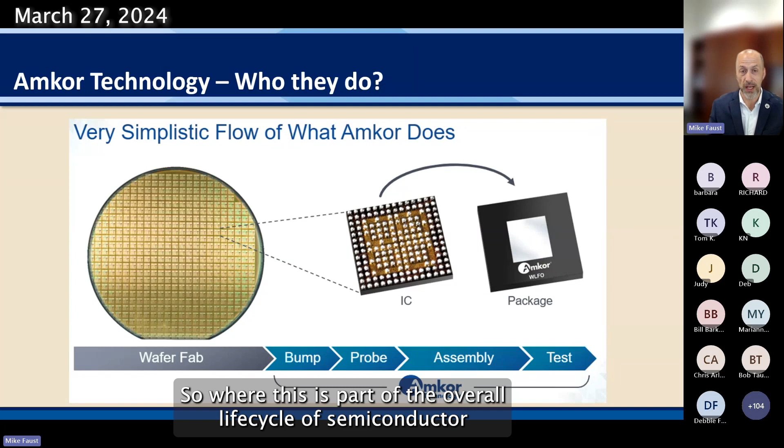What actually happens in the Amkor process: their base product is that wafer, all those small little chips. They cut those chips off, then ultimately do a series of subsequent processes where they package and assemble semiconductors and microelectronics, then conduct that assembly process and ultimate testing. So this is part of the overall life cycle of a semiconductor manufacturing process, but it is very, very different than the wafer fabs that are Intel and TSMC.

We've received a lot of questions about where Amkor will be located. This map is a conceptual development map of 5 North at Vistancia. Amkor is specifically a 55-acre project site within the broader 320-acre project overall. If you look at this map, El Mirage is on the left side running north and south. Lone Mountain Parkway bounds the north end of the park, near the community shown by the blue and red lines. Down on the southwest corner, that white boxed-out area, that's where the Safeway is, at the corner of Vistancia Boulevard and El Mirage.

So that gives you some context of where this is. The property is located off of El Mirage, about 3/8 of a mile from any of the single family homes that are currently existing. And so that's where it's located.

We've heard a lot of folks say, well, this is displacing, or we will no longer see the planned retail. That's not an accurate statement. This is in the employment section of 5 North at Vistancia, and I'll touch a little bit on the zoning for this particular area.

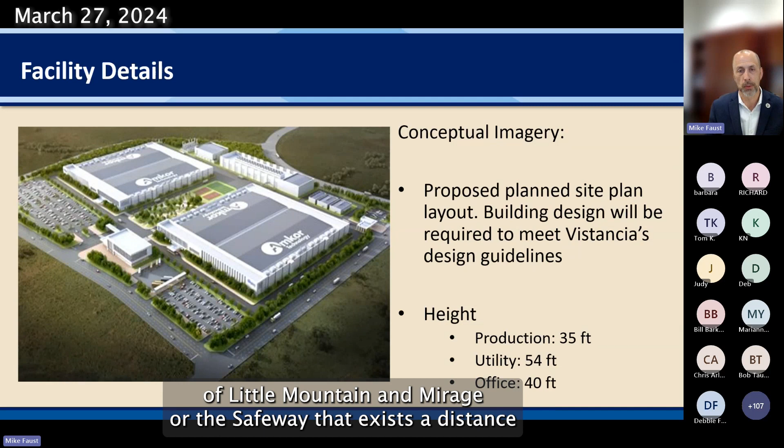To put that in perspective, the Fry's being constructed on the corner of Lone Mountain and El Mirage, or the Safeway at Vistancia and El Mirage, those buildings are about 35 feet tall. So in the broader context, from a height standpoint, the production building should match the look, feel, and size of those properties north and south.

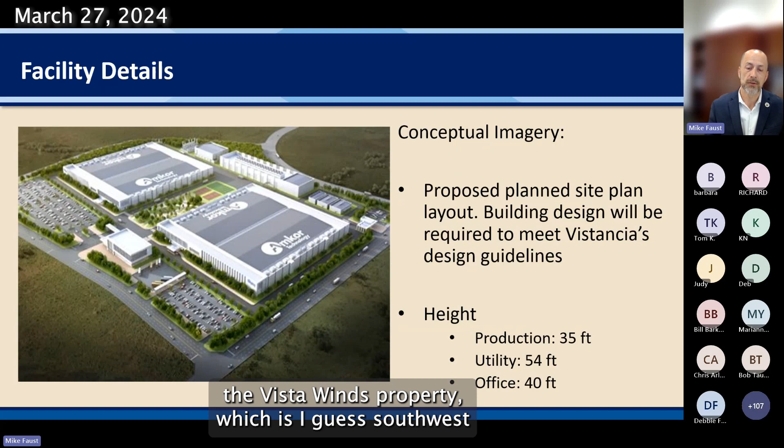I will note there is an office building on the property intended to be a touch taller, currently projected at about 40 feet tall. And the tallest building on site is currently projected at 54 feet tall. To give you a point of reference, the Vista Winds property at the southwest corner of Vistancia and El Mirage, that building is 60 feet tall. So to give some point of comparison, you've got buildings out there taller than these ones, and these ones are designed to fit the look and feel of the community.

So we've got a couple other questions. Will the landscape fit the look and feel of the area? And the answer to that is yes. The same landscape planning and approvals have to go through the Vistancia Design Committee.

We've had some questions about what type of additional outreach or communication there will be with this project. Specifically, the site plan review process requires public outreach. As the site plan comes in and is being reviewed, there is a public notification that goes out to inform people, so we can share with you where we are in the process, but more importantly, what the latest look and feel of the buildings are and what that site looks like.

We have had some people, and there was a specific request that the council not permit the planning and community development team to do their job and do the administrative review, but that these reviews be approved solely by the council.

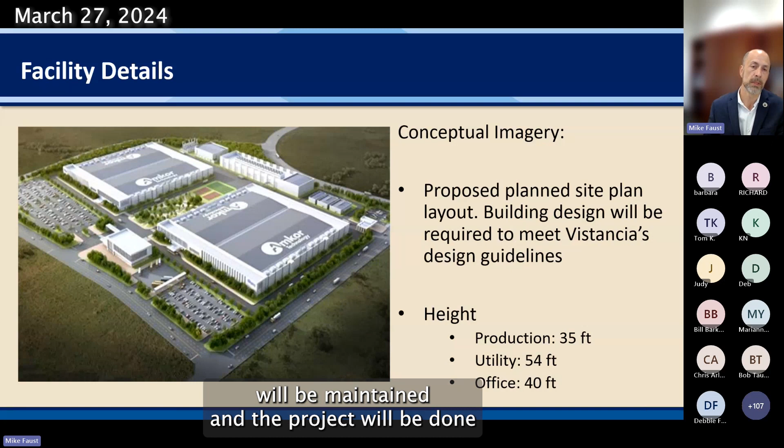We hear you. We hear the importance of getting the look and feel and everything correct. So we're cognizant of that, and it's important to us to show the community that a lot of thought has gone into this, a lot of detailed work, and that the Vistancia guidelines will be met, the look and feel will be maintained, and the project will be done with a high level of respect for the broader community. So you have our commitment on that.

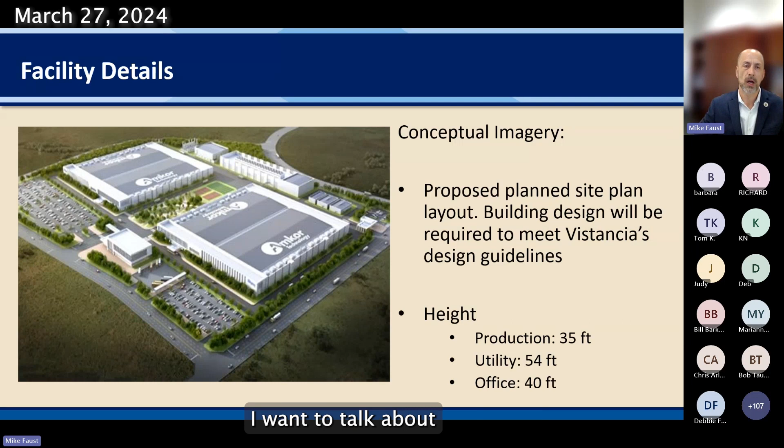I want to shift now from the site. We talked about where the building is, to a little more detail on the site. I want to talk about some of the environmental and utility questions that we've received.

So there's been a handful of questions, and I can tell you, having worked intimately on this project now for the better part of 8 months, a lot of energy and effort, probably more than on any other aspect of this project, has gone into this area because of the importance of environmental concerns and water security.

First and foremost, I'll highlight the fact that this facility, from a production standpoint, by our agreement, must run on reclaimed wastewater. That means water that comes through the sewer is treated at the wastewater treatment plant, then put out as reclaimed water, which is non-drinkable, and will be utilized for this production. That's an important note, and a very wise use of that water resource.

Secondly, we've gotten some questions around the water demands. The facility will utilize in each phase of the project 200,000 net gallons per day. I want to be specific what that means: for each phase, it will utilize 1 million gallons of water per day, which sounds significant, and it is. The key, though, is we get 80% return from the facility, and that 80% is cleaned and put back into the recycled loop. So when you have 1 million gallons going into production, with 80% return cleaned and put back into the system, you have a net effect of 200,000 gallons a day.

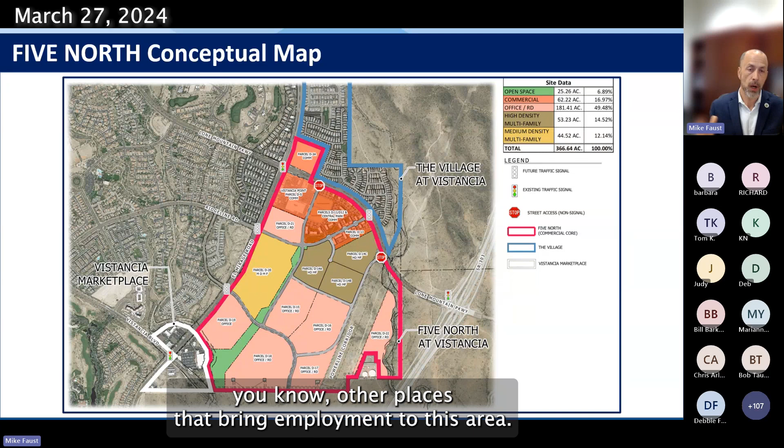What you have here is the conceptual map for the 320 acres that make up the 5 North at Vistancia. I touched on the peach colored area a second ago, which depicts exactly where the Amkor facility is, shown here as D15 and D16, 55 acres. You'll notice some peach color directly below that — that's intended for employment use as well, office and other places that bring employment to this area.

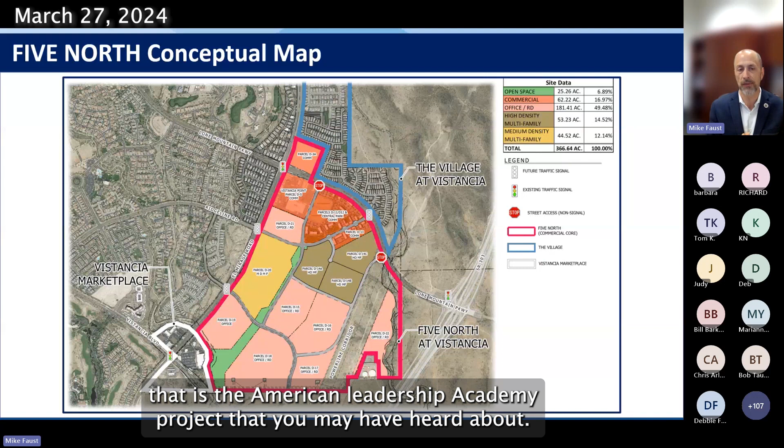As we move north into the project site, you see the three brown square parcels — those are multifamily units, planned to be the apartments you heard so much about last summer, and that's where they'll be located. If we transition west into the yellow area, this is also multifamily, but less dense, meaning fewer units per acre than in the brown. If you transition south of the yellow into the other peach and the green, that is the American Leadership Academy project you may have heard about — a public charter K through 12, which I'll highlight in a few minutes on another slide.

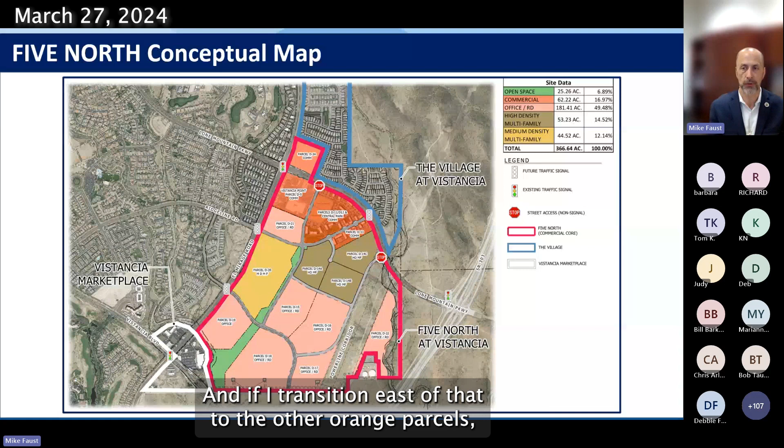As we move to the north end of the project site, you see the orange. In the left corner, the hard corner of El Mirage and Lone Mountain Parkway, that is the Fry Shopping Center that is currently being constructed. Transitioning east of that to the other orange parcels, that is the upscale amenity area that so many people have expressed desire for.

So let me highlight a couple of things. The first and most important thing is that the Amkor project site, if anything, enables and helps this come to fruition. It doesn't prohibit it.

I've seen communication and questions that say, now we're not getting what we were promised as a community. But in reality, the Amkor project and employment centers at 5 North at Vistancia help enable the restaurants to come, because in the restaurant business one meal alone isn't enough to open a business. They really need breakfast, lunch, and dinner, and need to get 2 or 3 turns on those tables to make enough revenue to be successful. So we see this employment play in 5 North of Vistancia as an enabler to help this happen.

Some folks have asked, could you share the names and the timing? The answer is, not yet. I just had a conversation with the developer the other day. The project is still intended to move forward. They're working diligently and excitedly to deliver the vision they've constructed. It's a fantastic vision, and the city is looking for opportunities to partner and help enable it to happen sooner. But for where they are right now, it's premature for them to communicate specifics or give an exact timeline. We're hopeful that happens sooner rather than later, and bringing density through employment and through the multifamily apartments is just part of activating that.

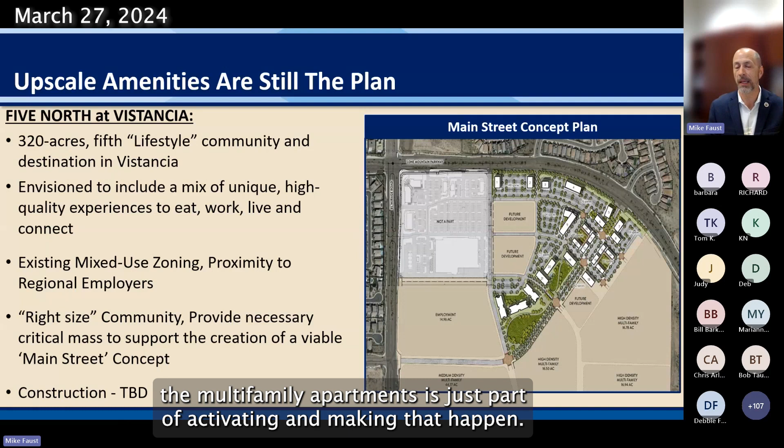I want to touch briefly on the American Leadership Academy, since a lot of folks have asked about it. Where the high-end retail is located on the north end of 5 North of Vistancia, American Leadership Academy is located in the southwest corner. I'll answer a couple of questions we've gotten, though I won't go into full detail on the execution of this project—I think it'd be great to come back and do another session specifically on it, because it's such a fantastic thing. But let me touch on a couple of key components.

There's some confusion about the city's role in planning schools. At the end of the day, the city doesn't have a role inside the broader unified school district's construction and operation of schools—in this area, that's Peoria Unified School District's responsibility. But we want to be good partners, continuing to bring forth projects and solutions to help them, whether that's planning for land or helping those projects advance.

This particular parcel of land was always contemplated for a school. Although the original intention was a Peoria Unified School District high school, for a multitude of reasons that hasn't happened. So we were excited when American Leadership Academy came to the table with a public charter school, a K through 12 option offering families of Vistancia an alternative. They're targeting 2,400 students, with 1,200 in the high school. This is fantastic because there's a need for schools as the community continues to grow, and American Leadership Academy has a track record of successful schools throughout Arizona—I believe this will be their 18th or 19th project, and it's a great addition to the community.

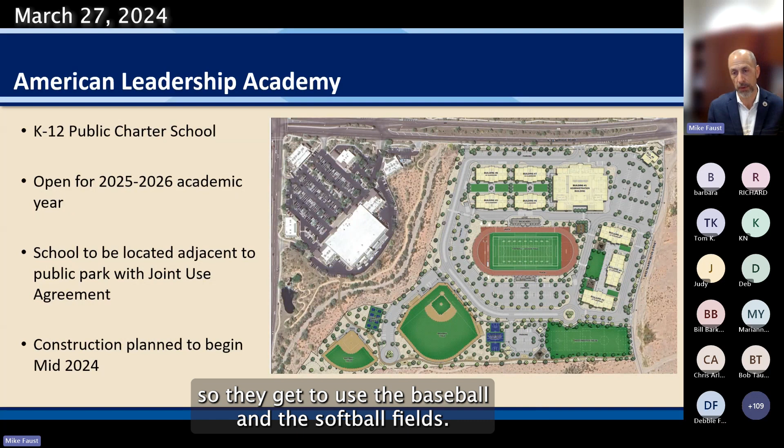The school gets joint use of the fields, so they get to use the baseball and softball fields. The cool thing is the city is now working on an agreement with ALA to get use of the gymnasiums and their facilities as well. If you live up in this area, you'll know this is a key thing - how do we get some of these amenities up here? I think this is a great solution.

I'll touch on this more in a later slide. The goal is to stagger this, so the school would be done in summer of 25, and the park would be done in summer of 26. The team has thought through and planned a lighted pickleball court built into the concept. We don't have the construction timeline for that yet, but it is built in. So we're bringing new amenities to the community through this special use park.

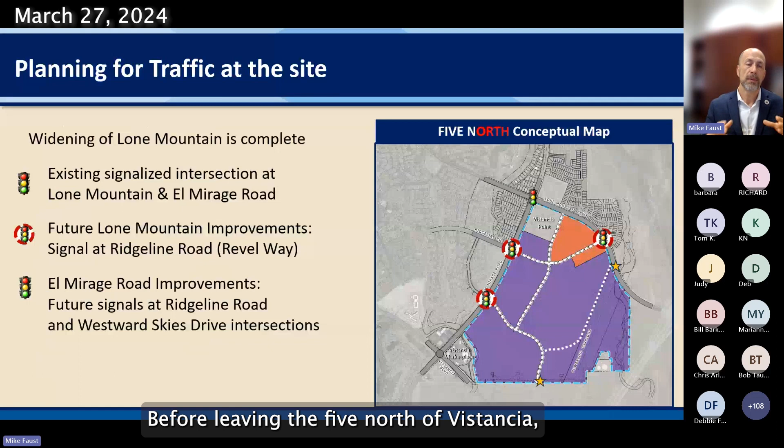Before leaving the 5 North at Vistancia, I wanted to touch on traffic, because a handful of people have asked questions about traffic planning and what we've done to think about it. I'm going to touch on traffic as it relates to 5 North, and then in the next slide zoom out for a traffic discussion from the broader Northwest Peoria area.

Each of these dotted lines is a conceptual alignment for a roadway. Now it's more than conceptual - these plans have all been submitted to the city, the majority are already approved, and now the developer is working on the construction timeline. Before I get into all the roadways, I'll touch on the first one.

If you look on the southwest corner on El Mirage, you see two stoplights with red circles around them. Those circles indicate a planned signal that's not yet constructed. In conjunction with construction of the ALA campus, you will have what's called Westward Skies, the road that will exist just north of the heights, just north of the K through 12. That signal is currently being designed and will be constructed and in operation prior to the school opening.

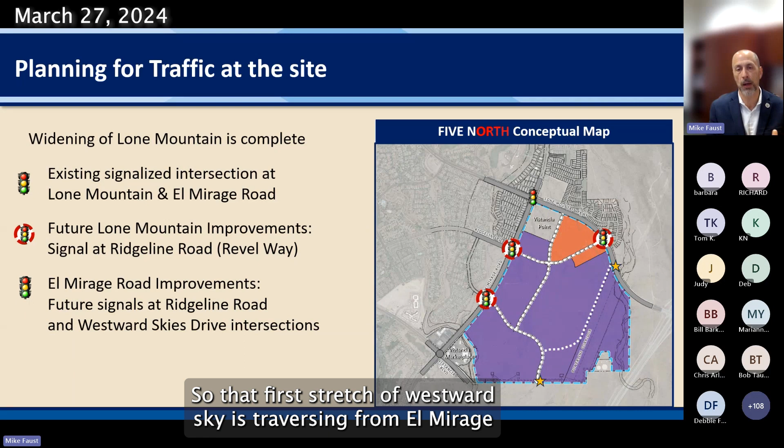The team's been working diligently to make sure that happens. It's critical, and we're watching this very closely. That first stretch of Westward Skies traversing from El Mirage east will be constructed along with the high school. The rest of the roadways will come online as the projects build out - as Amkor builds out its roadway system will be built, and as other pieces of property build out, those roadways will be built as well.

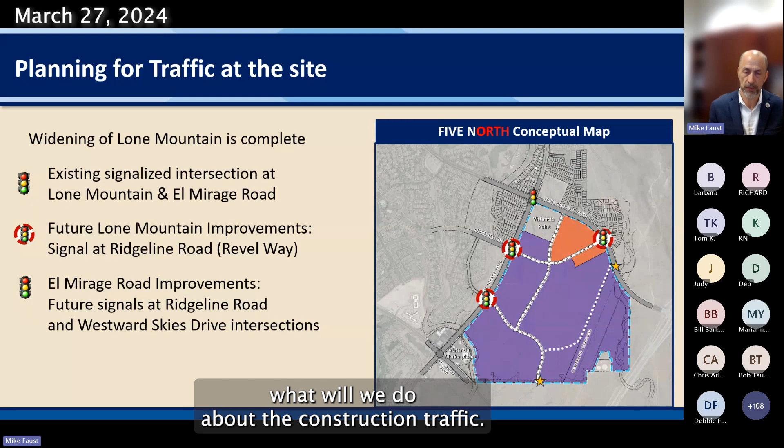Before I touch on traffic generated by Amkor, I want to touch on construction traffic, because we've gotten a lot of questions about what we'll do about it. I want to highlight there are two yellow stars on this exhibit.

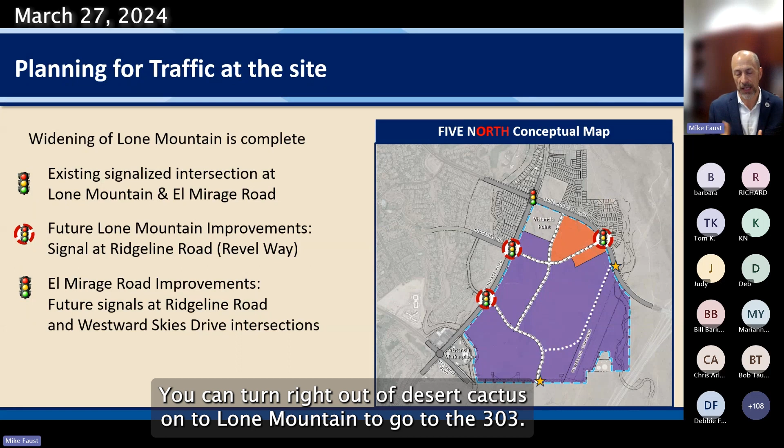The one on the north end, that roadway attaching to Lone Mountain, is called Desert Cactus. That road is what we're planning as the primary source of construction traffic. It's currently built out for three-quarter access, meaning you can turn right off Lone Mountain into the property, turn left off Lone Mountain onto the property, and turn right out of Desert Cactus onto Lone Mountain to go to the 303. We see this as the best and most viable pathway to bring construction traffic in without bringing it onto El Mirage.

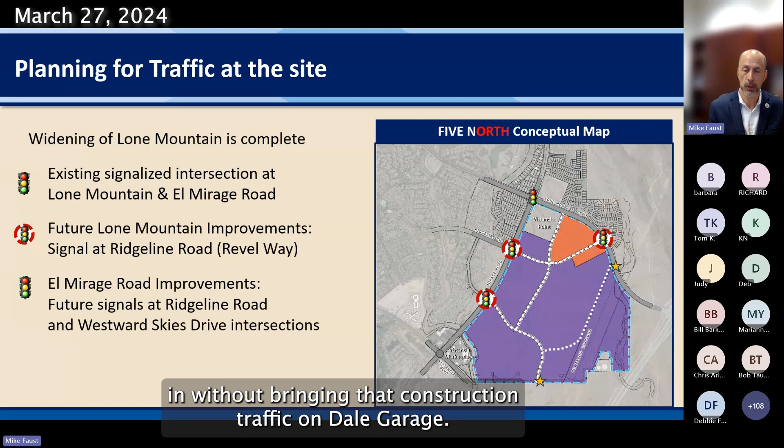There's a lot of planning that has to go into that, and I'm not saying there will never be a piece of construction traffic on El Mirage, but a lot of thought is being put into moving traffic in the area without burdening the community. Second is the star on the bottom of the image. Westward Skies is planned to go from El Mirage past the K through 12, wrap around and turn south. Right where that star exists, due south of that is Arizona State Land. We have approached the State Land Trust and the State Land Department asking permission to construct that road early.

And what that would be is a connection off of Vistancia Boulevard into this site. We believe that returns value to their property, that sits due south of 5 North at Vistancia. But we believe that also returns value for this overall project site by directing traffic away from the Vistancia El Mirage interchange.

Again, those are the plans, those are the discussions. I've learned a lot since being at the city, and one of the things I've learned is the amount of attention to detail and planning that goes into our transit system. We have thought through and contemplated roads decades into the future, but when it's time to construct, it does take several years to conceptually lay it out, to buy the property, to then construct. And so a lot of work remains to be done, but we're hopeful we can find alignment with Arizona State Land to construct that road early.

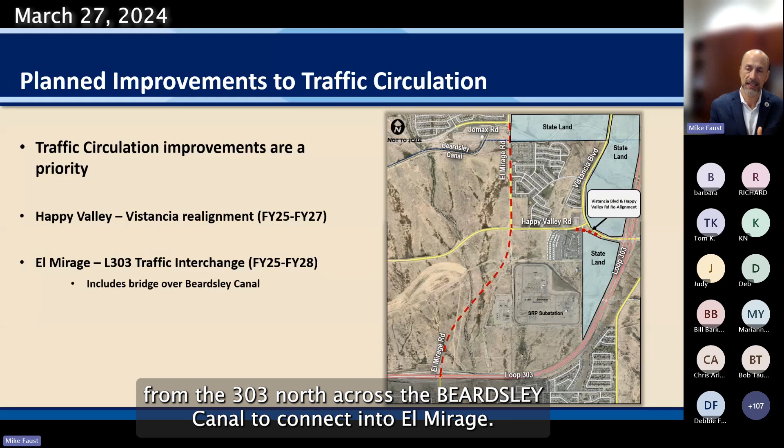The first project I want to highlight is El Mirage Traffic Interchange from the 303 north across the Beardsley Canal to connect into El Mirage that currently dead ends at the Jomax alignment. I'm excited to announce that ADOT did a kickoff for the design concept report for that project just this week. The city hosted it here on site.

And this road is very important for two primary reasons. Number one, it adds a third access point to the community because we have Lone Mountain, which is an access point. We actually have, it'll be a fourth. We've got Lone Mountain, we've got Jomax, we've got Happy Valley that transitions in, but then bringing in El Mirage offers a fourth entryway into the community. So that's huge from that standpoint.

Number two, it provides a lending hand to Surprise because we find people have to traverse through our city to get to the northern parts of Surprise, and building out El Mirage allows people to exit the 303, get to Happy Valley Road, and transition west into Surprise without clogging up the Vistancia Happy Valley intersection.

It is important to note where we have launched the design concept report for this. This is a federally funded project. It is a big project. It will take time, but the fact that it is started and it is no longer conjecture, it is actual forward action, is a very, very positive thing.

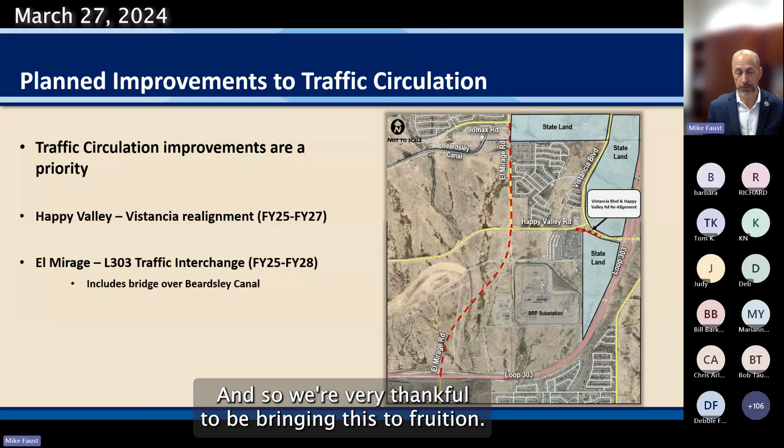The team is working through a more formal design concept report now to get into start looking at alignments and land acquisition. This project too has been worked with Arizona State in partnership with Arizona State Land, because as you can see from the map, they own the land north and south. So we just talked to them as early as Monday about building temporary roadway to allow through traffic while we reconstruct the intersection. A lot of details to go there, but we're very excited about this project. A lot of forethought, a lot of planning has gone into it. And so we're very thankful to be bringing this to fruition.

I just want to step out one last time before we end our time together and talk about next steps. From a macro level schedule standpoint, we've touched on each of these, but I'll just drill them back home.

July 2024, we're expecting the American Leadership Academy to break ground, so construction will start in the area. We expect the roadway north of it and the signal to get constructed. By June of 25, for an August 25 launch of the school year, that roadway, signal, and campus are all in place.

Looking forward a few months, September of 2025 is where Amkor, by their agreements with us, must break ground. They can break ground sooner, but at the end of the day they have to break ground by September of 2025. That's where it lays in the schedule.

I mentioned earlier that the joint use public park and all the amenities are slated to launch a year after the school opens, so we think August 2026 is that timeline. There might be some movement in these dates, but based on what we know today, this is the most reasonable completion timeline. With Amkor breaking ground in 25 and the park finishing in 26, we see Amkor construction taking roughly 2 years to complete, wrapping up in 2027.

Now, I did miss a key point I don't want to skip over, which is traffic. There were some questions about traffic generated by Amkor, and I don't want to leave without driving home the point that we have analyzed this in detail. We looked at questions about commercial truck movements, and given how small semiconductors are, we've talked to Amkor about this, and they're forecasting just 2 trucks in the morning and just 2 trucks in the afternoon, so that commercial truck traffic is quite low.

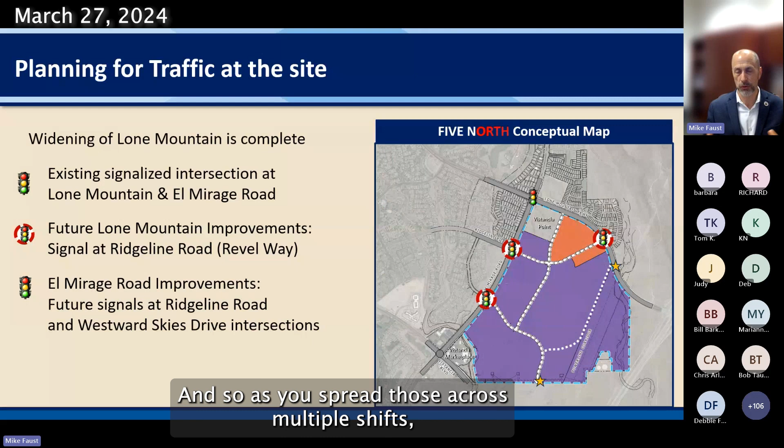Additionally, when they come online for their project, they'll only have about 300 to 350 employees at initial launch. Spread across multiple shifts, traffic demand in the area is not intended to be significant. The developer will be updating their traffic impact analysis throughout this project as these various aspects of 5 North of Vistancia come online, and we'll build out the roads to make sure they're capable of handling the demands. It's important to know we've thought through these details and know the roads—it's just a matter of timing of when they come online.

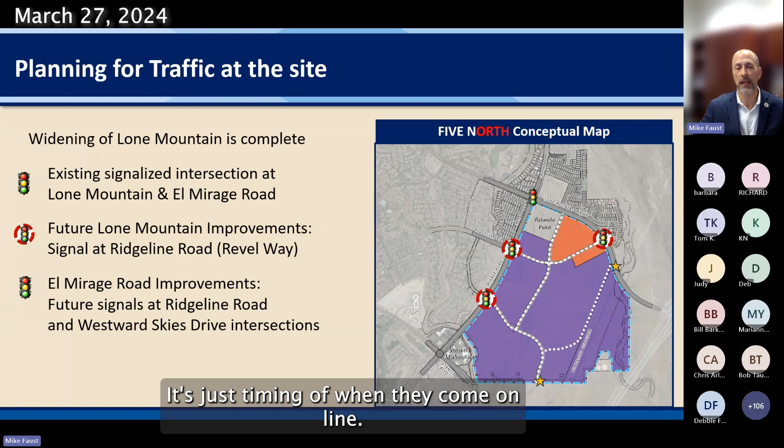Sorry, I didn't want to miss that point. As Amkor comes online in 2027, we've planned through each of these steps. And lastly, if there's a second phase of the Amkor construction, they have to be constructed by 2034, another 7 years out from the phase 1 launch.